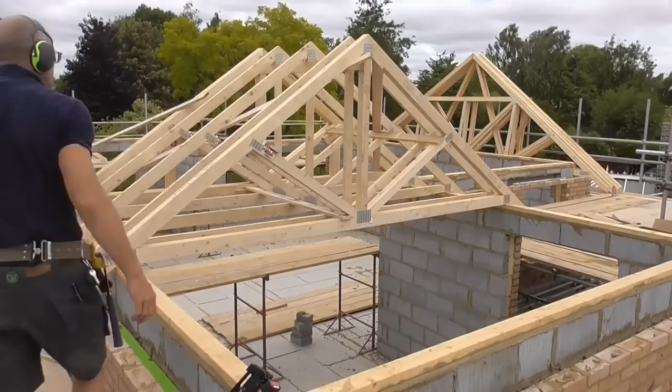Right, so just a quick update really. We've got a lot of the trusses up, didn't film too much of it because we've had a mad sort of morning. Got some of these trusses in and the main trusses are on the other side of the scaffold over there. We have hit a bit of a problem. There's quite a lot to think about on this roof. Although it's mostly trusses, it's actually got 8 hips on this top part.

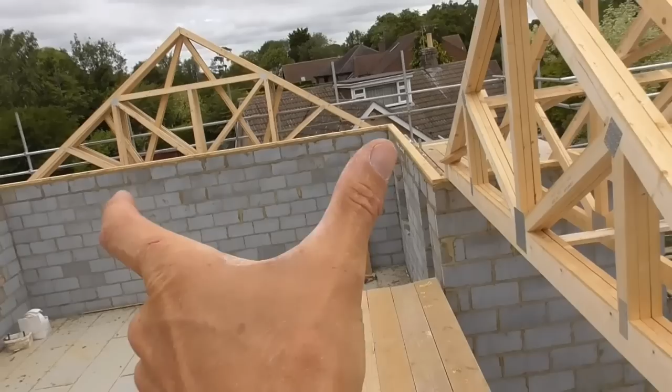I can't show you the drawing because they don't send drawings out anymore because it's all on your phone, so that's just a bit of a hassle. But basically what we've got, if you see, we've got that end. There's a hip end along that end, and then basically it transfers and there's a hip end along this end. So I can't get high enough up to show you, but basically this all the way down here is a big long run of trusses with a hip on each end.

That end obviously the trusses are sat on the plate. This end, the trusses have got to have the feet cut off and sit on this girder. So there's a girder here, and if you can see, what I've had to do is pull a line down and check the measurements from the plate on that end. So we've got the same measurement from the plate across the end of the roof from there to there. We've got to have the same measurement from here up to, where is it?

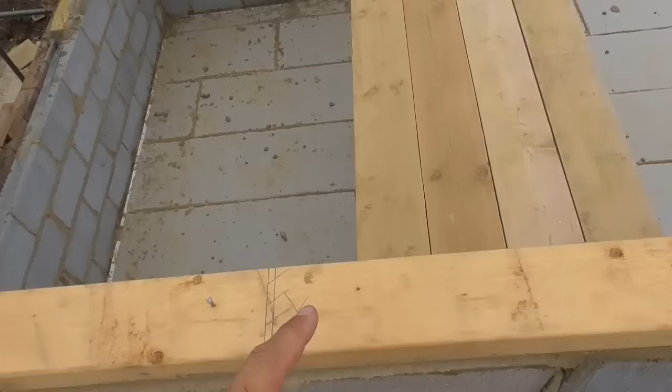Here. So in effect, if you imagine this plate running all the way through here to this corner, this would be the hip line. But instead of the trusses sitting on a plate, they're sitting on a girder like that with the feet cut off. So that triple girder's in, and we've got a flat top triple girder here because there's hips coming up off this corner as well. Obviously there's lots to do to set this out to get it all in the right place.

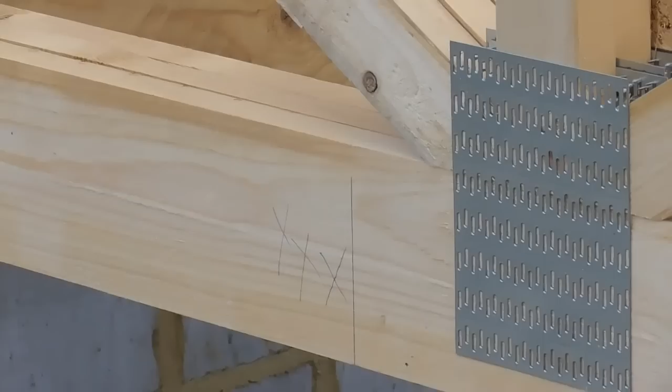I don't know if you can just see, I might be able to zoom in, let's go for zoom. You can see that pencil mark I put there with those 3 ticks, that's where another double girder goes across here. So there's a triple girder here which takes a double girder which goes all the way across there into another triple girder there.

The issue that we've got is that in the design, the designer has missed it off the drawing. They haven't applied the metalwork, the double hanger. Consequently, we haven't got it, so we've had to sort of stop work. But when they went back to the drawing, after I told them that it's missing, they found that this triple has got a 146 bottom chord on, but this triple here, this girder, has only got a 125 bottom chord.

So what they found out, when they applied the truss hanger, the shoe, onto that girder, the computer says it doesn't work. So that bottom chord isn't wide enough to take the nail detail of the hanger, if that makes sense. I know this probably might sound like gobbledygook. So the truss designer is going to get back to see what we need to do to that bottom chord so that it can take the hanger properly. Plus, they've got to find out if they've got the hangers in stock and can send them out.

So that's why we just threw this little bit in here. So we are a bit stuffed because although a lot of these trusses can go on here, we really do need to set it out from this end because we've got to put that double in and then all these mono. So it sounds a bit complex. There is a lot to think about. And unfortunately, I had it all in my mind how I was going to do it today.

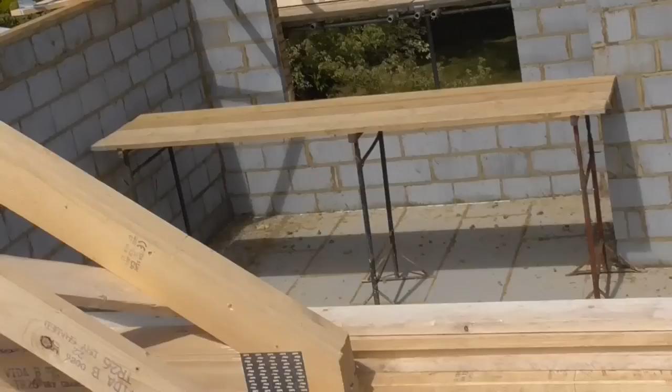Right, so finally we had to go. They've redesigned the connection point that I talked about earlier for that triple, and they've sent out these big hangers here, so we had to go and get those. A bit irritating if I'm honest. We've got some sort of funky screws there, so at least we can crack on now. The guys we marked out, they're going to start nailing those on.

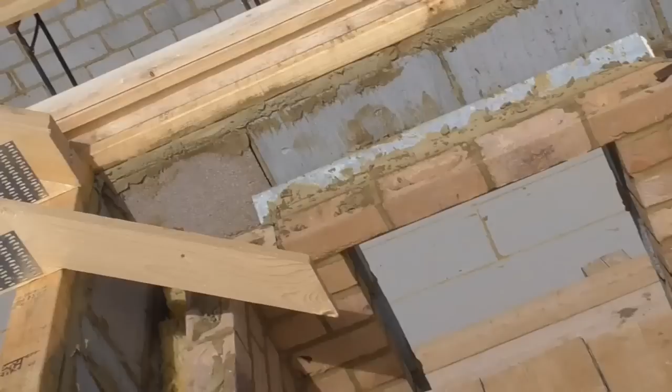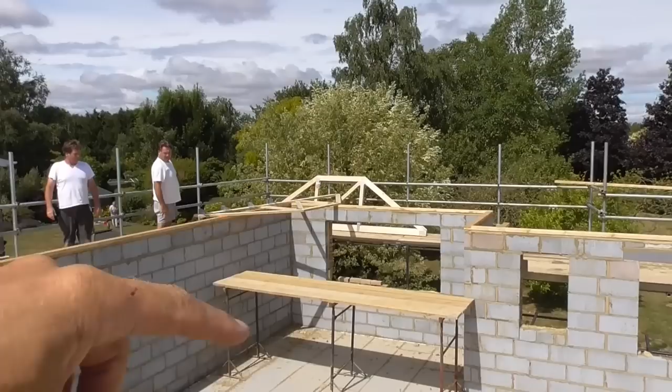I've set out the rest of this hip. Oh, hang on, am I going to zoom in there? Yeah. I've set out the rest of this hip, this end. I'm just about to mark some bracing up because obviously these trusses have got to be braced together, and then we can start putting them in, dropping them into this triple here, get that triple all gang nailed up over there, and then we can start standing in there as well. So let's go.

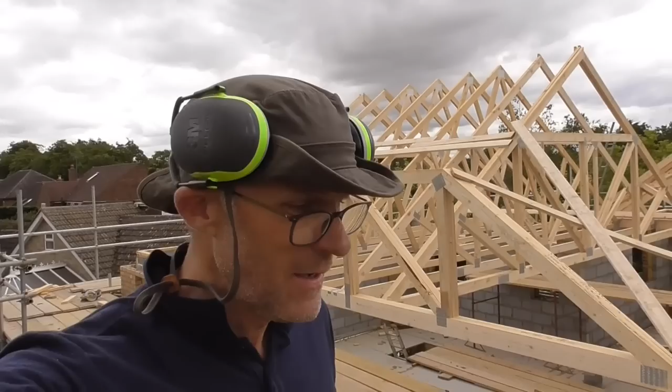Right, so you saw us there. We got those trusses up. It was a bit of a struggle actually. Seemed like hard work. It was all a bit at sixes and sevens. But anyway, we've got them in, and you won't have seen it in the time lapse, but it was really struggling to get a nice roof line to get these to line through. It looks absolutely horrific. It's like some of the trusses were higher than the others.

And of course, as usual, when you have a bit of a problem, you start to think, well, have I done something wrong? But basically, we've got to the bottom of the issue and the fact is that the trusses haven't been manufactured properly, and I'm going to quickly show you what I'm talking about. So if we have a look at these trusses here, you'll see that we've got 10 trusses, but we've got 6 of one type and 4 of another. So the 6 of one type are these flat tops. You can see that we've got 3 each end with these flat top elements in.

So we've got 1, 2, 3. There's a double on the end there which takes the monos that come across, and then a single. They've got the flying rafters in the top which get cut around the hip, and then we've got basically the same on the other side. We've got a double and then a single. So that's those 6 trusses, and then we've got these 4 trusses in the middle. We've got 1, 2, 3, 4. They're just a standard truss, and obviously as you can see they haven't got that flat element in. Now the trusses should all be exactly the same.

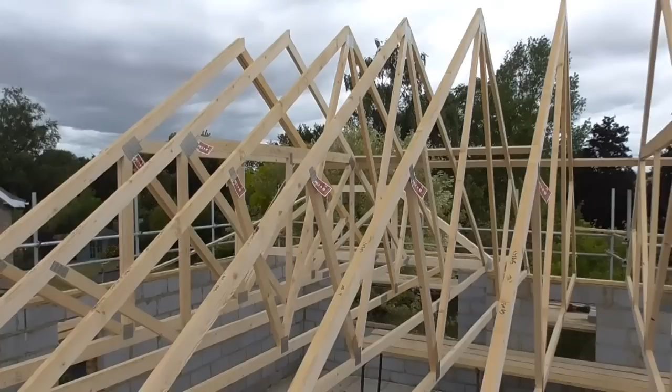Now the problem we were finding is, as we were lining them through, and what I've done is I've tacked up this bit of 4x1 on the top here just to highlight. As we were lining them through, I don't know if you can see there, look, you can see that those first 2 trusses are in one plane, and then when we've put these other 4 in, they're lower.

And basically what's happened is we've checked the drawing, and the top chords of these 6 trusses, which was the double and the single, same each end, is a 97mm timber, and that's what it says on the drawing. But then when we come to these other 4 normal trusses, they've only used an 85mm timber.

So consequently, as you can see, if I have a look down there, you can see that we've got a fairly decent line here, because this has obviously got the wider rafter timber on, and it touches nicely there. But then obviously as we go further down, look, they're low. As you can see, these 4, same the other side, are all low, and as we get back up the other end there again, look, they're in a nice line.

So the issue we've got, we can't really just crack on. We've done the hard work here, which is lugging them all up. The next job would be to fit all the bracing, which is all marked out here, and get them so that they're solid and we can leave them for the day. But obviously we don't want to do that, because we have to get in contact with the truss manufacturer, and unfortunately it's lunchtime at the minute, to basically find out if these 4 middle trusses are still going to work structurally with an 85mm rafter chord instead of a 97mm rafter chord, which is what it shows on the plan.

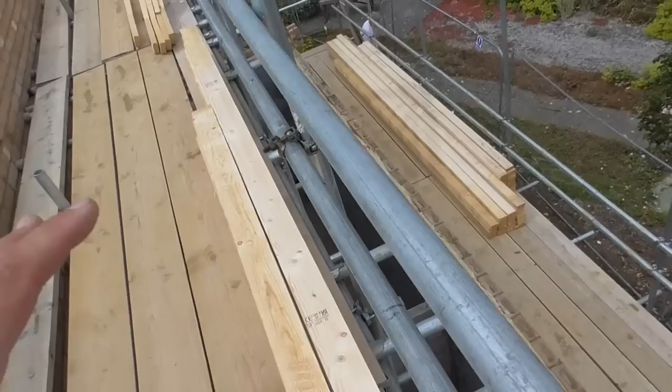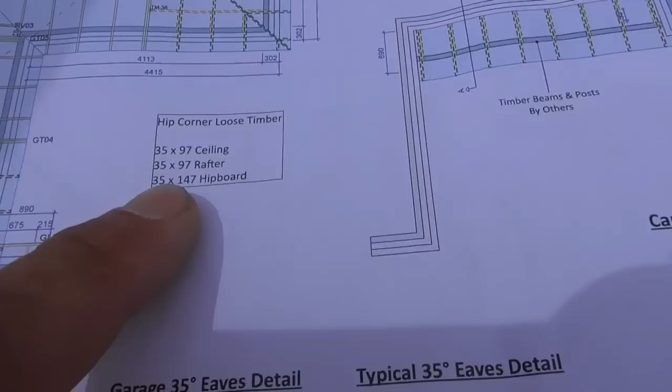Now I'll show you, have a little look at the plan. I don't know if you can see that, if it's reflecting in there. This whole job has got 12 hips, you see, 1, 2, 3, 4, 5, 6, 7, 8, 9, 10, 11, 12. That's the lower roof here, and that's a garage roof. So there's 12 hips, and it clearly says here, look, here's the loose timber, that we've got a 35 by 147 hip board, that'll be for this roof, and then on the lower roof, look, it says 35 by 147 hip board for the lower roofs as well.

So as I said, we've got 12 hips there. These ones down here are probably at least sort of 6 metres. So I've got 1, 2, 3, 4 at least 6 metres. And these ones will probably be maybe 4, 4.5 metres, maybe 5 metres.

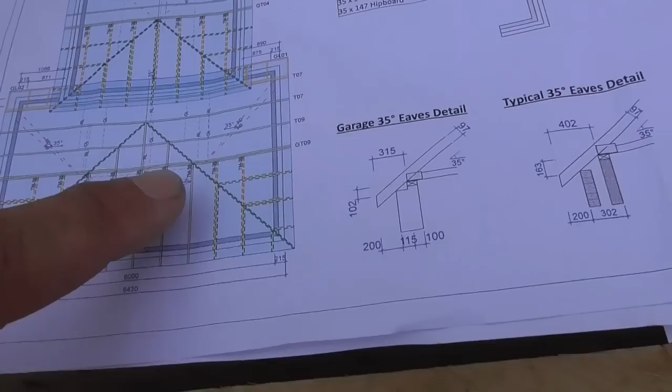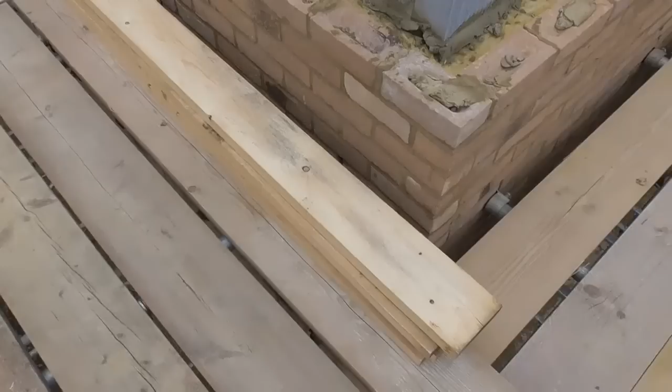So again, I showed you some of the timber, but I'll show you the hip board material that we've been sent. Someone just taken off the board here completely. That's it. These 4 lengths are 147 by 35, and they are 4.5 metres long. That's all they've sent, for a job that's got 12 hips, and they've only sent out 4.

And they are absolutely, I don't know if you can see that there. The quality of them is revolting. They say a bad workman blames his tools, but I've kind of had the optimism beaten out of me today, to be honest.

Really looking forward to this. I'd kind of absorbed the plans and thought I could get my head around it, and then it's just one stop after another. So we're waiting to hear back about the timber and the truss design, whether it's going to work with that smaller rafter chord. So just getting a bit fed up now.

So now, while I'm waiting in a sort of no man's land for engineers and designers to get back to me about what we can do with this roof, whether we can carry on, I thought, what can I do? And we got quite a few doubles and bits and bobs. So I thought what I'll actually do is start nailing them together. And I'm pleased to say that the old nail gun didn't let me down.

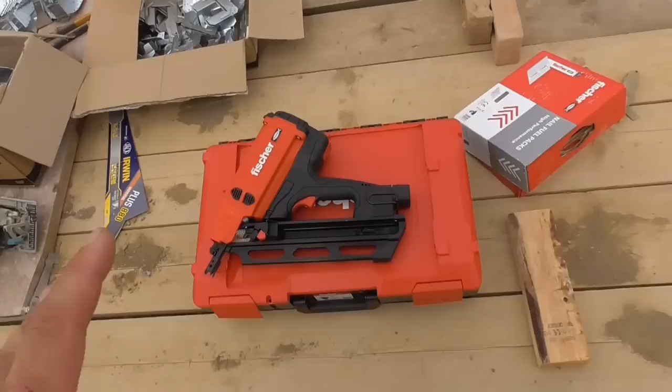It's an absolute beauty. I'm not going to go on too much about it, but first day using it, it's lovely. It's got some really, really nice features. It's working really, really well at the minute, which you'd expect because it is day one. But I'll continue using it, and once I've got a few thousand nails through it, I'll probably do an update video and let you know if it's all as good as it looks at first glance.

And using it for this first day, it's absolutely fantastic. But you have to get a few hours using a tool to find out if there's any bits and bobs that you think could be improved on or niggles. But so far, yeah, really, really happy.

Right, well, it's not like me to normally concede defeat, but I'm sick and tired of waiting now. We ran into problems with this roof this morning at 9 o'clock. I got here, had to put it off for maybe a week because I was away. Got here really revved up to go, really looking forward to it. It's going to be a really nice, interesting roof. And to be honest, it's been one problem after another.

But a problem with the hangers: they got missed off the drawing, and then when we reminded the designers to put them on the drawing, they had to test them from an engineering standpoint. Then we had to drive, fortunately not too far away, to pick them up, because there's 4 of us here with our thumbs in our backsides not doing anything.

And then the next problem we get is the rafter chord on the 4 middle common trusses has been made of a different material. So I've got in contact with the designer again, and he's gone to his engineer, and they've asked me to take additional pictures of the nail plates. But there's no urgency. I don't know how their world works, but in our world, when you're up here on the coalface, you can't just be stood around.